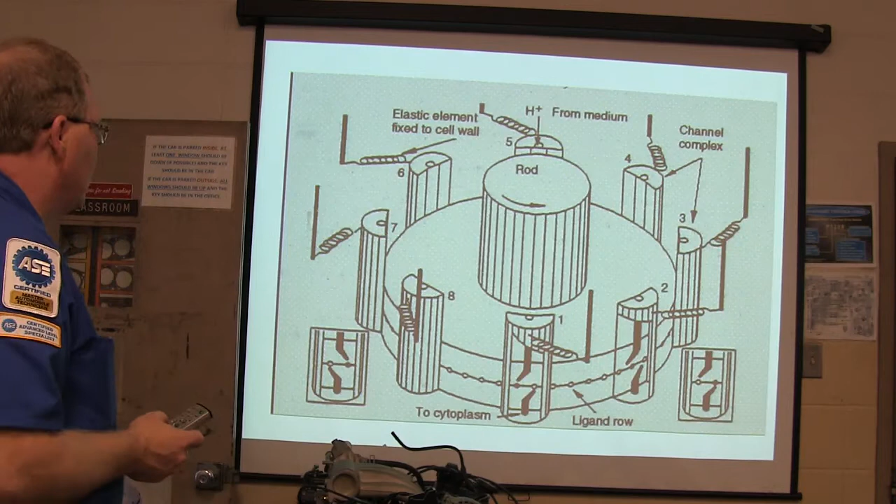But we're gonna run through a little something here today, give you some stuff. Who recognizes this? You ever seen that before? I can't tell what it is just looking at it. Is that gonna be, is that down there?

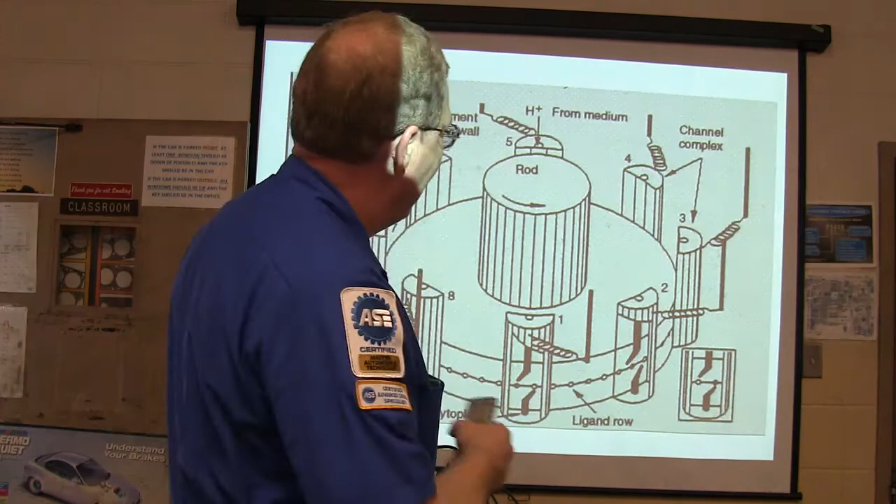This is a really amazing electric motor. It can spin 10,000 RPM, and within a quarter of a turn it can stop and spin back the other way just as fast. That's pretty impressive, isn't it? It's got over 40 parts here. If you take one of the parts out, it won't work.

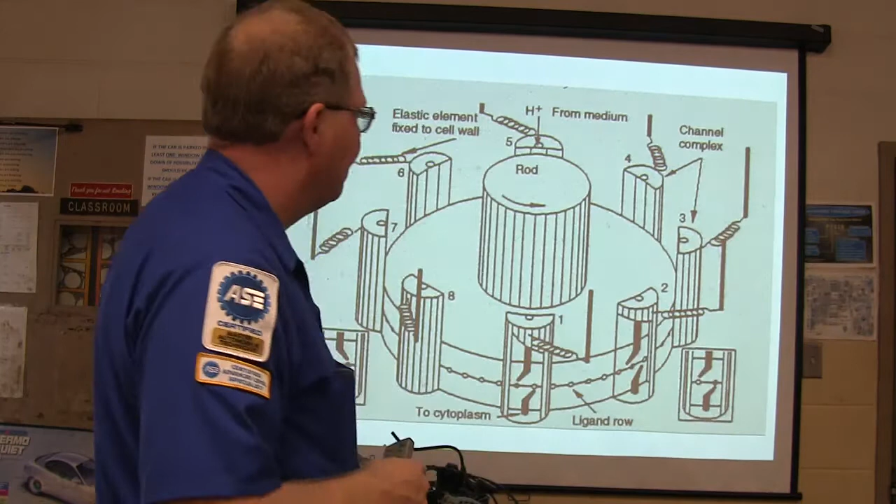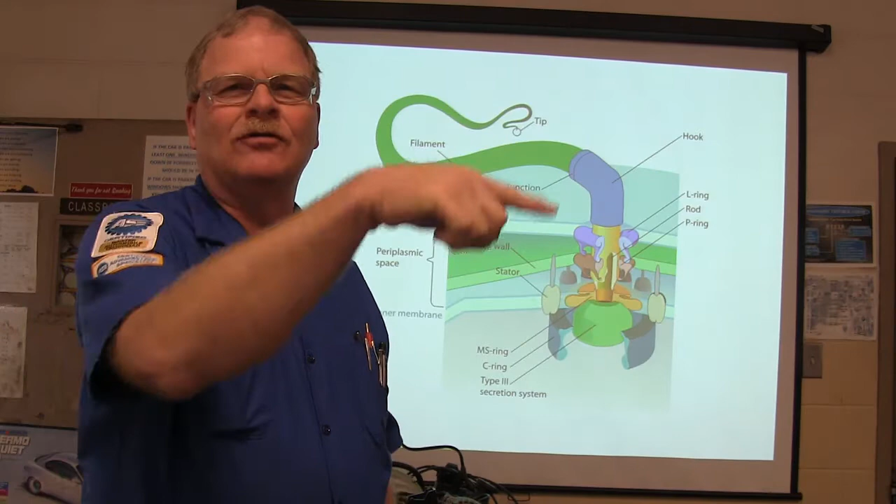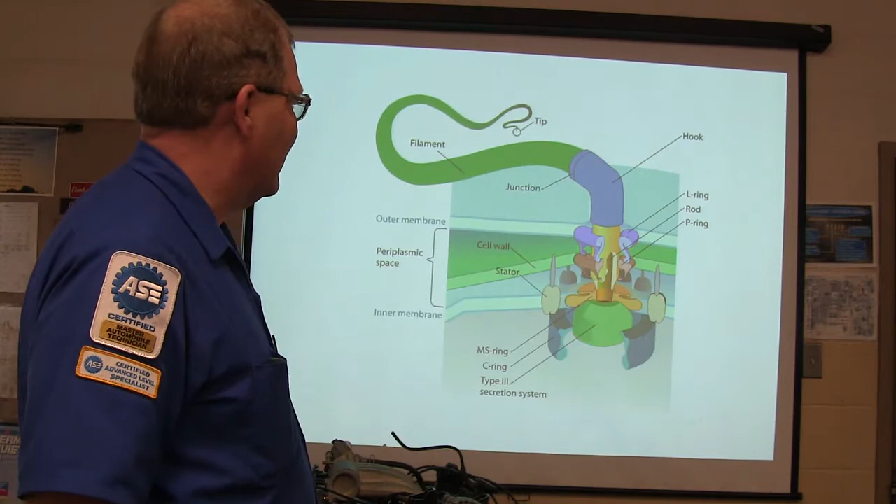Golly, what car is it? Though, like whatever it's on this car or something. That is that little motor that spins the tail on a bacteria. See that little whip-like tail on the back of a bacteria that moves him around? That's the diagram of the motor that drives that. You got that? All right, I just like to start this off with that. It's just amazing to me that it's that tiny and it works that well, you know.

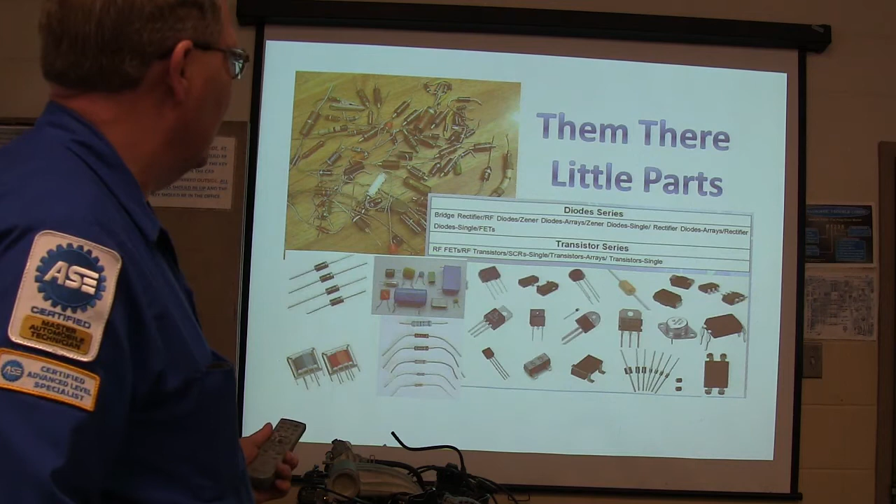You got these little bitty parts here. All of the stuff you see in these that we've been using for a long time, all the little electronic parts, resistors, transistors, that kind of thing. You gotta recognize the fact that all these little parts make this possible. Some of these parts you may recognize, some you may not, but here's the various different resistors. A lot of what we're gonna talk about today is that, plus some wiring schematic stuff. What I'm gonna do is point out how these little stripes on these resistors work.

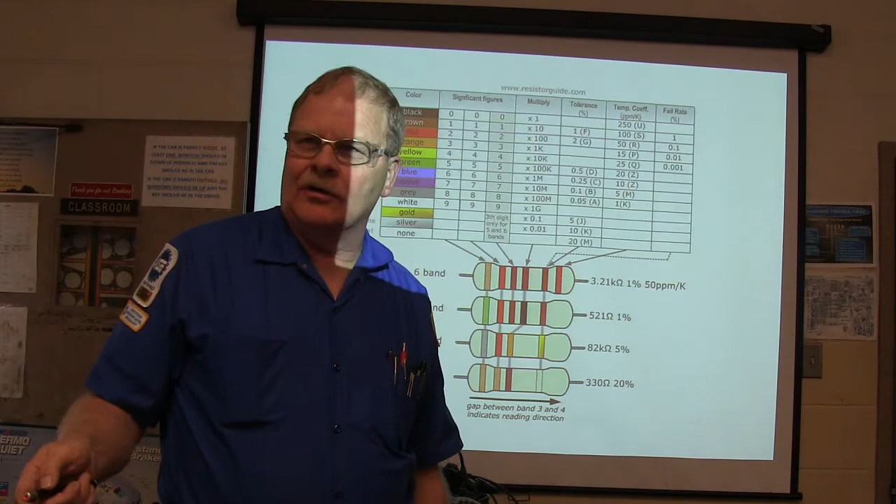So basically, here's another one I came up with: Big Billy ran over young George because Vicky grew weed, right? That's when I came up with it. I don't like the one they came up with back in the 1940s, and I don't even tell people what it is. This one says, bad beer rots our young guts, but vodka goes well, get some now. There's another one somebody came up with.

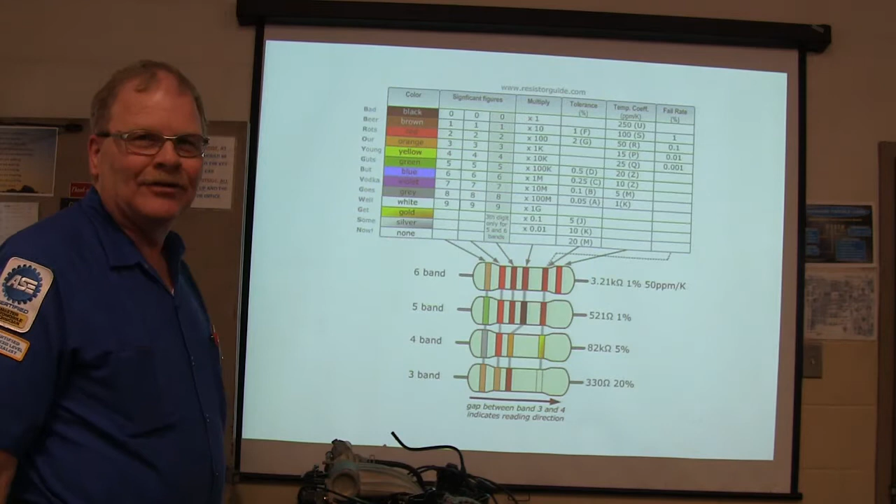What you start out with is they give you your colors and the numbers: black, brown, red, orange, yellow, green, blue, violet, gray, white, gold, silver, none. Now this actually gets a little farther than that. But basically, if you remember those colors in order, and you remember they start with 0 and count up to 9, you can get an idea of how much resistance the resistor has based on the colors.

I've actually got some resistors on a board right here that I have you figure up, looking at the colors, and then you go back and measure them to see if you got it right. This is basically just some electrical stuff. This is resistorguide.com, where I got this right here.

It's pretty good stuff. This right here is your first digit, this is your second digit, this is your third one, and then you do your multiplier. Now this right here looks kind of complicated, so what I do is move on to here: first digit, second digit, multiplier.

This right here would be just 5% or 10%, either gold or silver typically. Most resistors just have 3 stripes. So if your first digit was yellow, that would be 4. Second digit was purple, that would be 6. And your multiplier was orange, that would be 46,000 ohms. See that? The number of zeros is what that third band gives you.

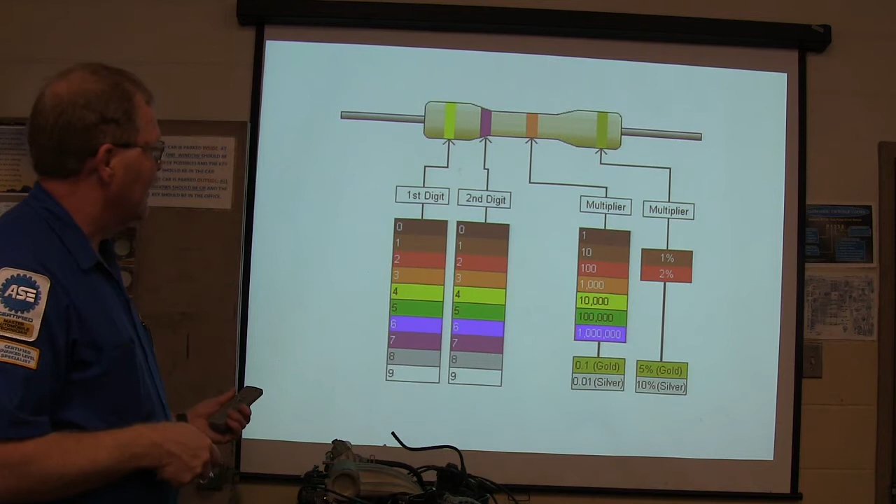But they all have got numbers there. So that's not anything terribly complicated, but whenever you look at a resistor like that, little bitty teeny tiny resistors, I've got on a lot of boards right now, they've actually got little numbers on them and stuff. Here's another one.

This right here was something I got from Radio Shack a long time ago, but I put the picture of the resistor on it. Black, brown, red, orange, yellow, green, blue, violet, gray, white. Now who can remember those without that little memory bug over there, right?

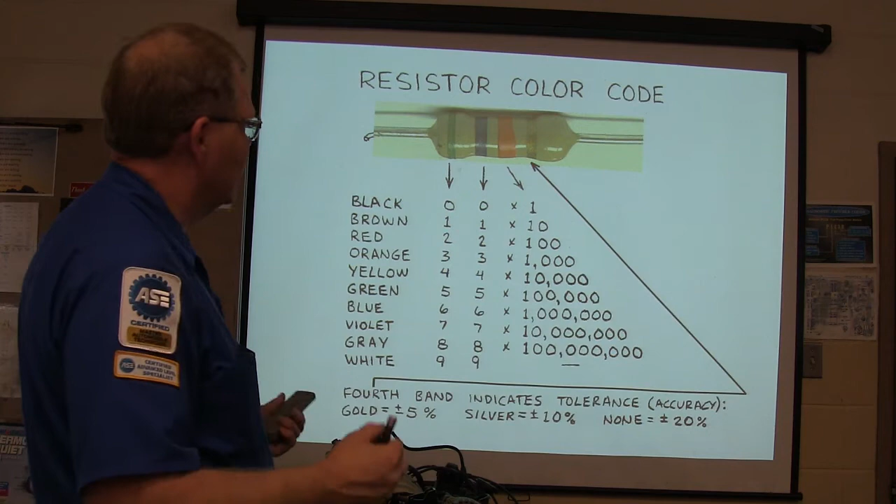Notice that the fourth band is the tolerance band, the third band is how many zeros. So that's your multiplier, always remember that. First letter, first number, second number, then your multiplier. So when you get the worksheet for those resistors, you'll know what to do.

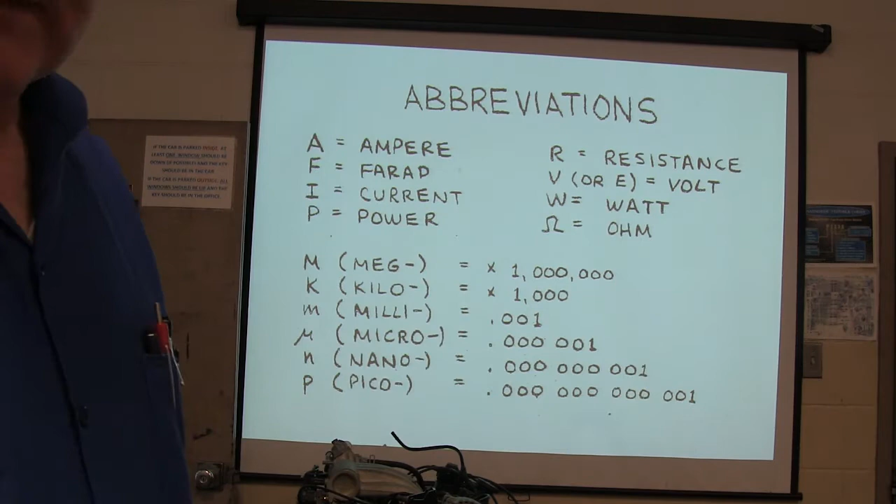All right, abbreviations: amp, farad. What's farad? Farad is the measurement of a capacitor. You got it? Most of them are like microfarads and stuff like that.

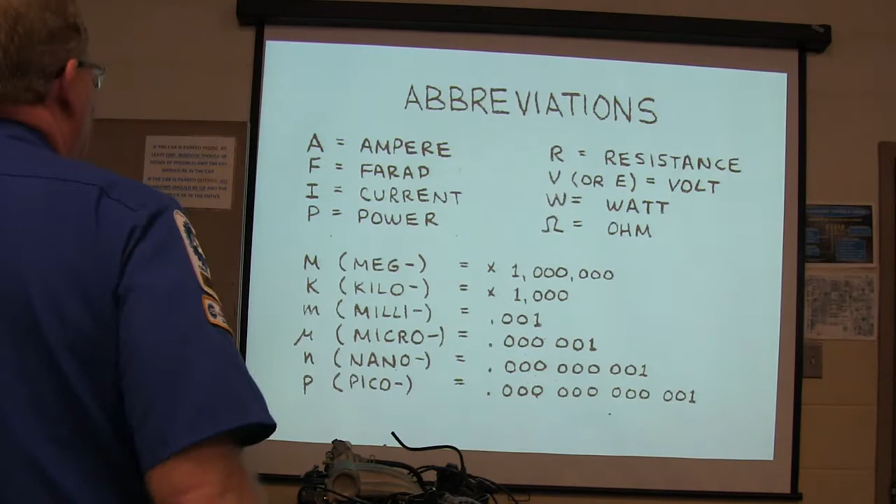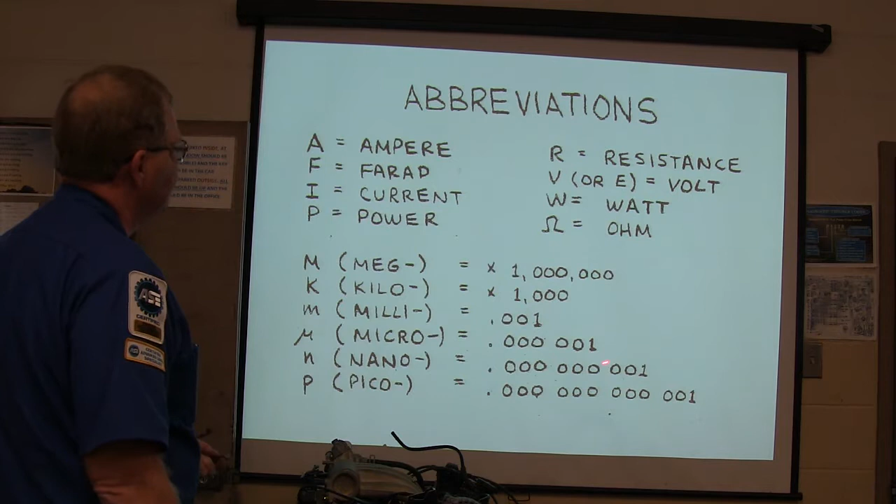Alright, so I is current, P is power, R is resistance, V is volt, W is watt, ohms, and then meg, kilo, milli, micro, nano, pico, basically all these little symbols that you're gonna see. When you start seeing those, I want you to recognize what they are, right?

Whenever you're doing measurements on a particular something, if you're measuring ohms, you want to start on the lowest scale where you can get a reading. You know why? Because you want the highest resolution reading you can get. If you're measuring a thing and you've got it on 200,000 ohms, you're going to read continuity like it's straight shorted, but you're not going to know how many ohms it actually is. What if it was 4 to 6 ohms? You wouldn't know if you were measuring on a huge scale. So go down to your lowest scale that it'll read.

If you can't get a reading on the 200 ohm scale, notice this is the ohm scale, that's your DC volts, that's your AC volts, it's only got 750 and 200 on that. Amps is going to be right here.

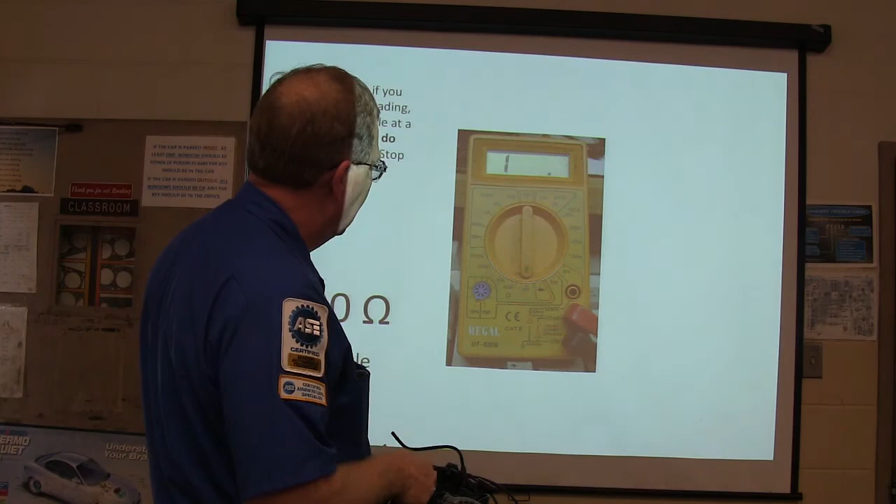Now, one of the most important things I can tell you guys, and I'm hammering on this all the time, is there's a reason I have these cheap little meters. A lot of other programs have those big old Fluke meters with that $10 fuse in them, but I don't like having to buy all them fuses. If you put that meter in that hole right there, this becomes a dead short. In other words, this meter becomes a jumper wire.

If you ever hook that to the hot and the ground side of a battery with it hooked up like that, with that in that hole, it doesn't matter where this is, that's a dead short. Now when you put it over here on amps, you're going to be reading how much current's flowing through that meter. So it's always got to be wired in series when it's in that hole.

When you got it in this hole, you're going to be putting it in parallel, which means you can hook it up to the positive and negative on a battery, or to the positive and negative on a bulb, or to the ground and then the hot side. But remember this, if you don't remember anything else: when you put it in this hole, there's a dead short inside that meter, and it can't carry but about 10 amps. So if you put it on the positive and negative side of the battery, the meter becomes a dead short and you've lost your meter.

This has already happened here this semester. Where's Dakota at today? Oh yeah, he said he's gonna be late if he comes, because he's doing stuff with his family. All right, I get that.

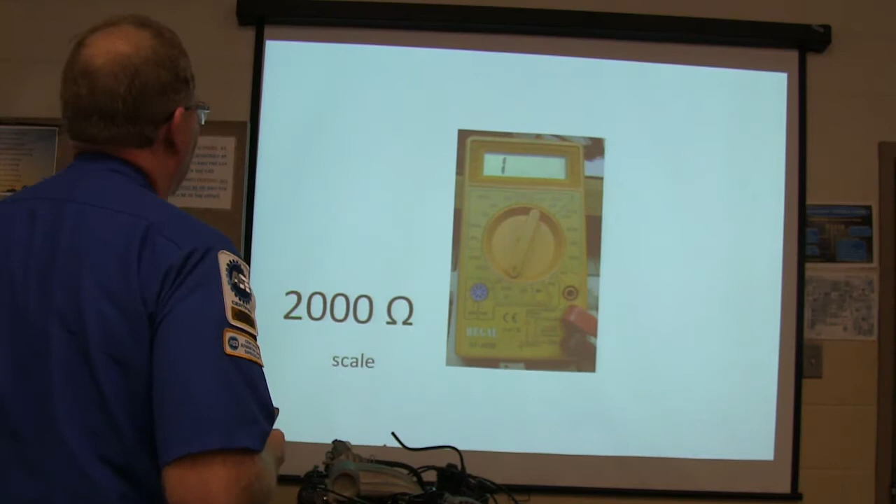2,000 ohm scale right here, basically you've gone up from 200 to 2,000. So if I was going to read an anti-lock brake sensor that had like 2,200 ohms of resistance, I couldn't use this scale, could I? Because it's more than 2,000. Or if it was going to be 1,950, and there was a chance it might bump up over 2,000, I might still get nothing.

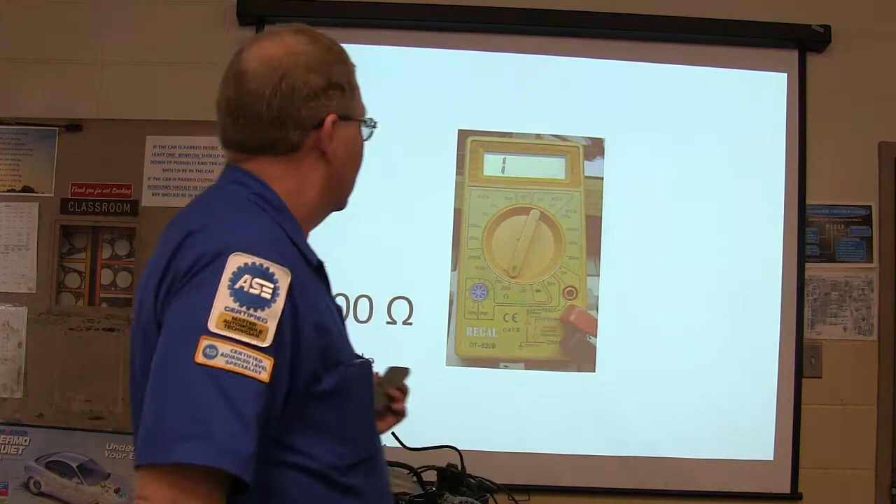This scale right here is 20,000 ohms, so it's going to read up to 20,000 ohms, but if I'm reading something that's 21,000 ohms, I ain't going to get nothing there, am I? So what I'm saying is you're going to go to the lowest range that you're going to read. That's true on volts too, but most of the time we're going to be reading on the 20 volt scale.

See if I can get that thing to go. 200,000 ohm scale, that ain't rocket science. 2,000K ohm scale is what, 2 million ohms. That's a heck of a lot, isn't it?

One time, me and the boys got a kit that we bought for like $10 or $15, and it had all the little bits and pieces of one of these, and we built one, put it together from scratch. The only problem is this little chip that drives this display, they didn't tell you which way it went. And when we put it together, we had multiple decimal points and the numbers were in the wrong place, all that kind of stuff.

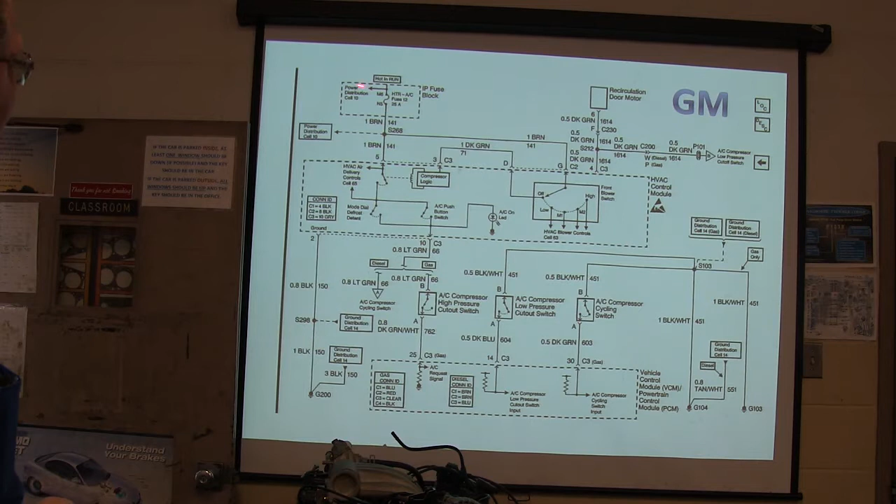All right, now let's look at wiring schematics here. This is a GM wiring schematic, the way they have it. Now these are hot buttons up here, location and description. Look at this right here, you got your fuse block. Always your power is going to be coming in from the top, and you got to be able to trace this power. Like if you're working on something that's not working, trying to figure out why such and such a component isn't working, you got to be able to start here. Whenever this happens, this power goes through here, and then when that happens, that's a little splice there.

That's going to turn on my LED, and it's going to go down here to the AC high pressure cutout switch. Your AC request signal - let's say you plugged in your scan tool because your AC wasn't working, and you looked at your AC request signal, which meant my customer is wanting to turn on the air conditioner. The vehicle control module, VCM, or PCM is basically going to be looking for this signal right here, this power, to come all the way through here. Now that's a current limiting resistor, and it's going to be measured - that electronics in there is making the measurement right there.

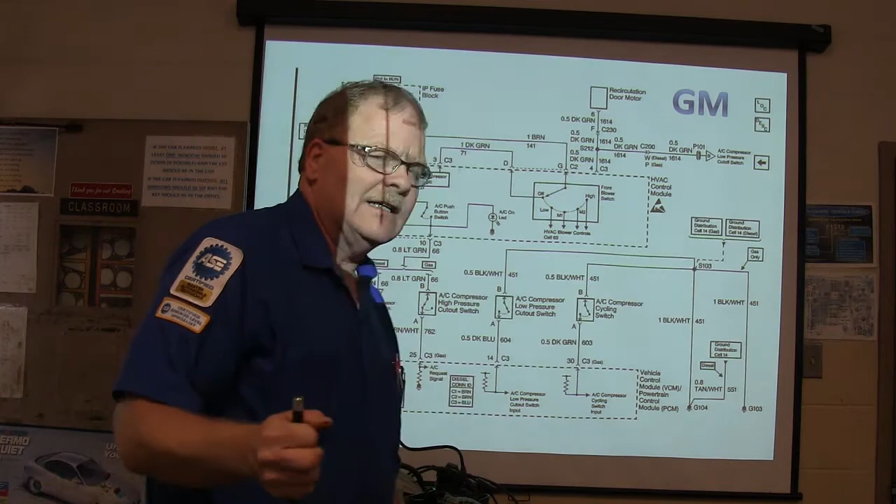So let's say I wasn't getting an AC request signal. My scan tool shows I've turned on the AC, but I'm not seeing an AC request signal. What do I do first?

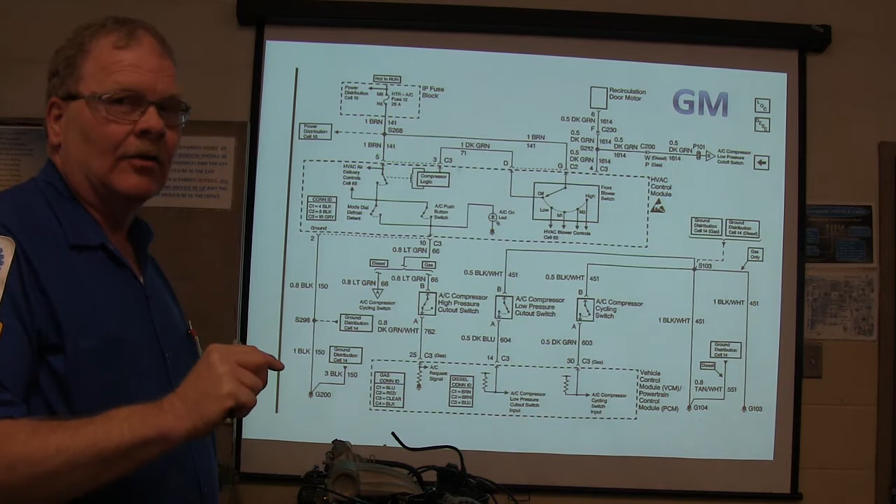Check the power supply - well, that's not a bad answer. Up here, the fuse might be a good place to look. It's a 25 amp fuse. But what I would also want to know is, am I seeing my LED? What if I see my LED, but I still don't get a request signal? What's that telling me? Notice this right here - click mode dial, defrost, detent.

So if that's burning, what does that mean? It's getting power in there - or there's your AC push button switch, so you've got power at least making it that far. That makes sense? Okay, and so then I'm going to go on down here, to the high pressure

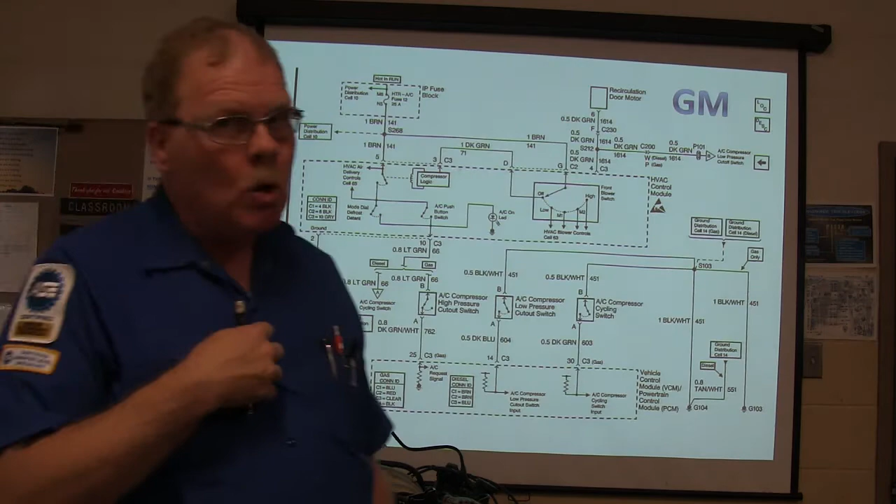cutout switch next, if it's easy to get to. And then I'm going to check and see if I got power right there. If it's going to carry a load, a meter is not a good thing to use.

I've actually got a video on my YouTube channel saying why a meter and a test light aren't enough. And one time the Ranger developed a no-start all on his own.

And so I went out there with the test light, and we took the bed off the Ranger, and we turned it on, the fuel pump wouldn't run. And I unplugged the wires from the fuel pump, and I hooked my test light to a good ground that I knew was a good ground, and I checked it, and when we turned it on, the test light burned.

And so I hooked the test light up between the ground feeding the pump and, actually hooked it up right where the pump would be, and the test light came on. I said, well, I got power and ground here. So we pulled the pump out and put it on the bench and fired it up with the power supply, and it went - running. I said, well, the pump works.

So the point is, if you're measuring the veracity of a ground or a power feed, and it's a load carrying circuit, like a fuel pump, you better be measuring it with something that will light up and pull as much of a load as your actual load does, or you're not going to get good results.

A lot of your schools will say don't use anything but a voltmeter on these modern cars because a DVOM is the only thing you're allowed to use. There's a guy that used to teach for Freightliner that came up here with his Dodge Caravan, wanting me to check his power windows. When I was checking him with a test light, I thought he was going to have a stroke - because he'd been teaching, he's an instructor for Freightliner, and he'd been teaching that you'll burn the computers up. I've never burned up a computer in my life with a test light. You know what I mean? I'm sorry, I just hadn't.

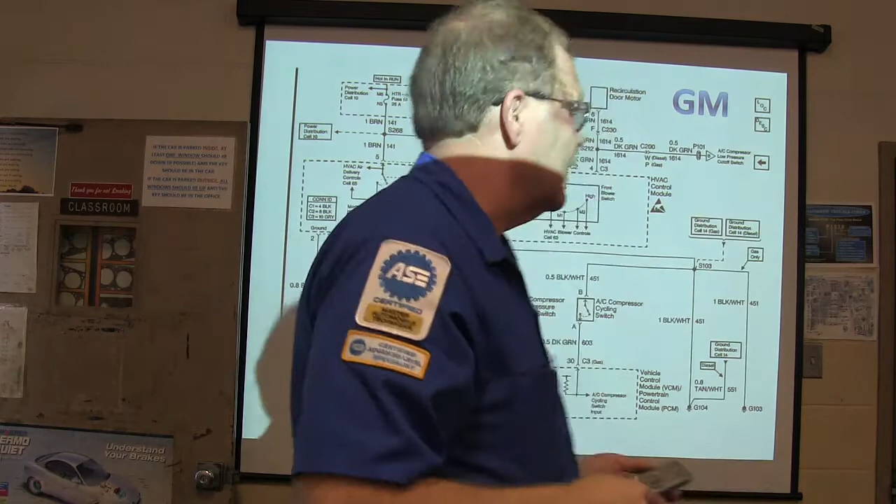But anyway, long and short of it is, this is not going to be a high current circuit. This is actually just going to be nothing but a whisper of voltage that's going to be coming in here through this high pressure cutout switch, and I can check this with my meter. All right, so I check on the meter, I see voltage here.

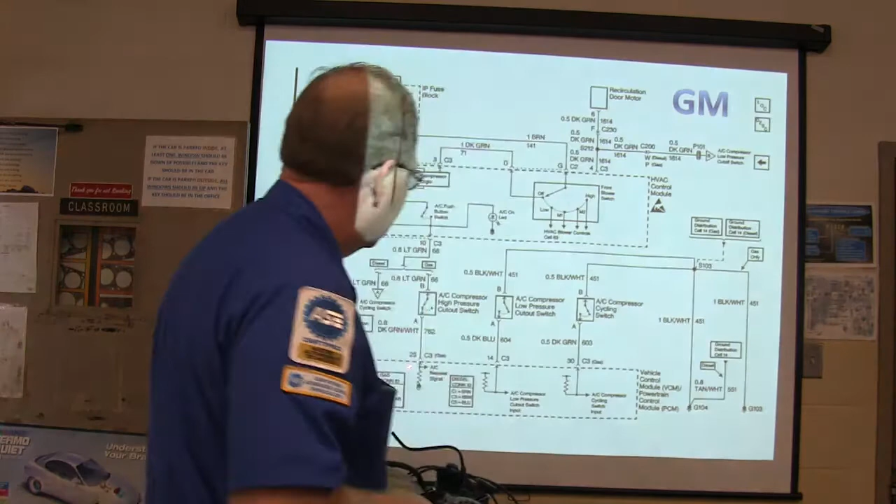With this high pressure cutout switch, we have to consider the possibility that we might have high pressure in there. Well, consider the fact that if you got a gauge on it, the pressure is not there. See, a low pressure cutout switch is actually looking for the same thing, but it's actually a ground signal. So if I don't see any power here, but I do see some here, I'm thinking there's a problem right there. I make a jumper, jump past that, and if my AC comes on, I know my high pressure cutout switch is my problem. You see how we're tracking that? That's how you do it. Ain't real complicated.

So anytime you're going there, all right, now let's look at a different one here. I can get this to move. All right, now look at this one right here.

You might notice on these vehicle control modules, they've got these connectors here, C1, C2, C3, and C4 - blue, red, clear, and black. All of the different connectors that go to that particular module on that particular truck, GM is really sweet about that - they make them different colors. If you're looking at C1 and C3, see these connectors right here? Dark green, white is your wire color.

What does that number right there mean? Anybody tell me? 459 - that's the circuit number. I knew you could read the number, but what is that number for? Oh, the circuit number is 459.

Now look at this right here. If you notice this leg that comes off of here, it only goes to the ones that have that particular engine in them.

All right, now there's your AC compressor clutch relay. All right, so look at your fuse here. Always go back and check your fuse before you do anything else.

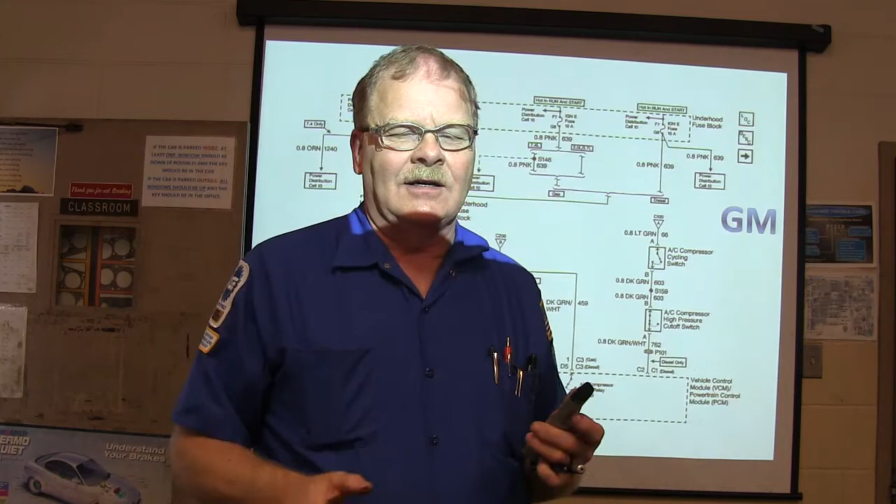Here's another rule of thumb. When you're doing electrical work, you might even trace your power on the schematic all the way down here. Go to the easy connectors to get to first - I'm always hammering on that. If it's easy to get to, go to that one first. All right, the fuse is easy to get to.

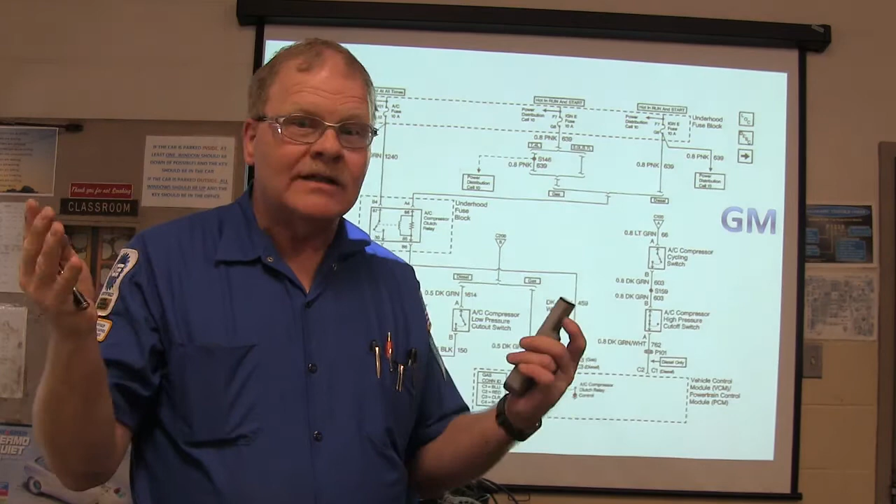Make sure the fuse hasn't been removed, because people will do that. They'll pull one from one place and put it somewhere else because their radio ain't working, and they'll jerk a fuse out. And if they don't notice anything that ain't working, they'll say well it must be alright. But then they bring it to you because their cruise control won't work because they moved the fuse out of there. Okay, all right, so there's your, now watch this right here.

You see this little mark right here? That means that's coming from another page. And on another page, you're going to see an arrow pointing down to there - I think it may be on the previous page, I could have found that. And if you gotta find out where that's coming from, that would give you an idea to track it.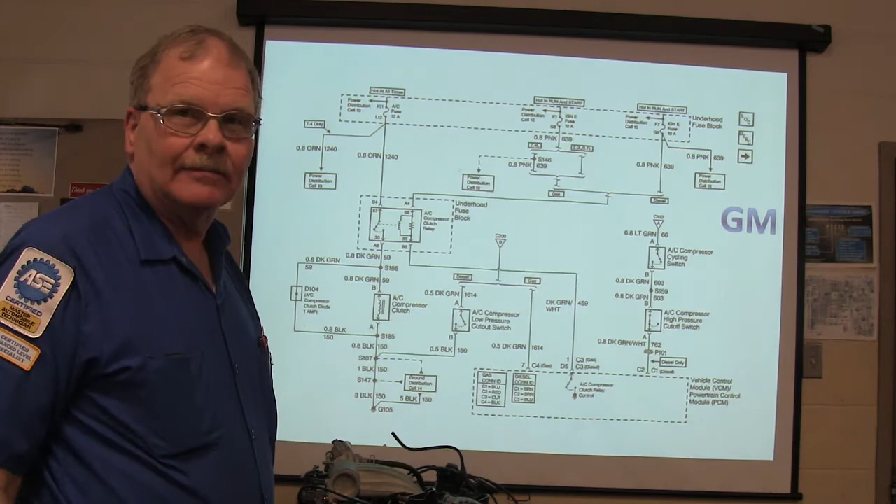They couldn't put - you see that wire schematic right there? That is the entire wiring schematic for a '64 Chevrolet Biscayne. The whole thing, one end to the other. Now that thing, ignition, that's hooked up to everything. Yeah, and now they've got, like on some of the cars, you'll have 3 or 4 books full of wiring schematics and stuff, but they draw them so that they can spread them across several pages.

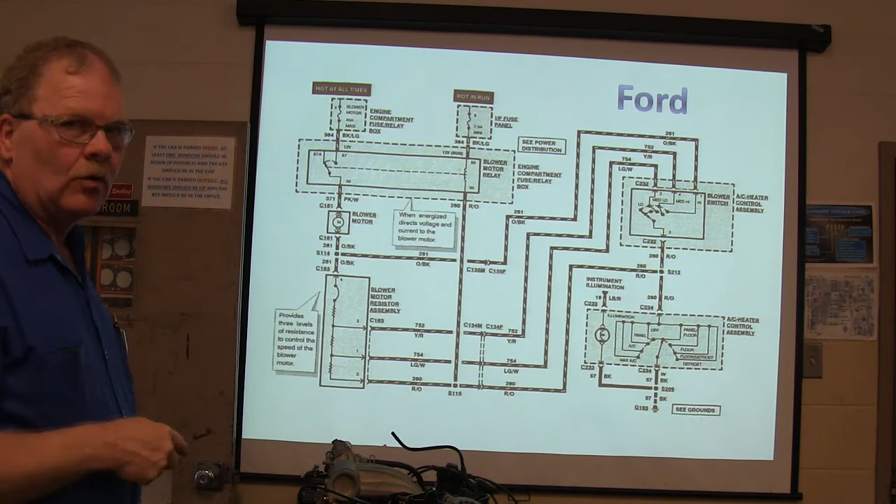And you notice the fuse is coming in from the top - you see a fuse symbol. You see this dotted line that's telling you that you're not seeing the whole fuse panel, you're just seeing that part of it. Your engine compartment fuse relay box, you're seeing just part of it, but you're seeing the entire relay. Solid line, you're seeing the whole thing. Dotted line, you're not seeing it.

All right, now if you've got little dotted lines that are connecting these 3 wires, they're going through the same connector shell. I can't hammer on that enough. Sometimes I say that and people don't get it when I put it on a test.

All right, your blower motor, look at this - the blower motor is hot all the time. You got that? So if my blower motor is not working, I'm going to look - see, the ground is actually fed through here. Now watch this. This right here, when that's off, see that? Now when I'm over here on max AC - excuse me, right here, panel - when I put it on panel, ground is available to this. And then my fan is actually going to feed it through these resistors. When I'm going through all 3 of them, it's low speed. When I'm going through...